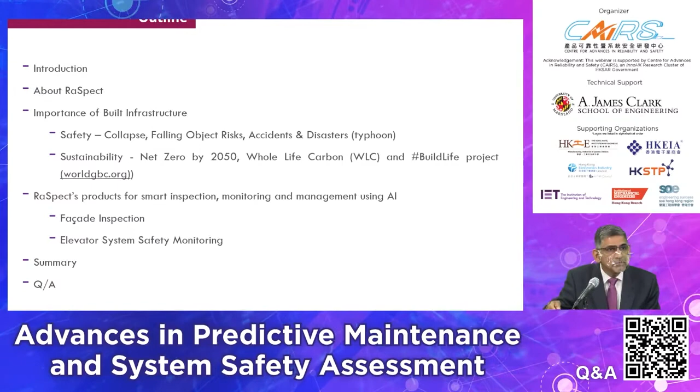Next slide, please. Raspect was founded in 2017 by young computer science graduate Harris Sun. He was at that time part of the Cathay Pacific Innovation Group, where he was bringing in some very novel ideas for inspection of aircraft fuselage.

As a civil engineer, I found when I got introduced to Raspect this story very exciting and inspiring, because very often we tend to ignore our built infrastructure, particularly when it comes to concrete, which is my background, reinforced concrete structures and so on. We don't put much value like we do, let's say, in the case of aircraft fuselage. So when someone is trying to apply the same sort of approach and technology to inspection, defect detection, and safety monitoring of our built infrastructure, which are quite important in terms of their value to society, I, as a civil engineer, definitely get very excited.

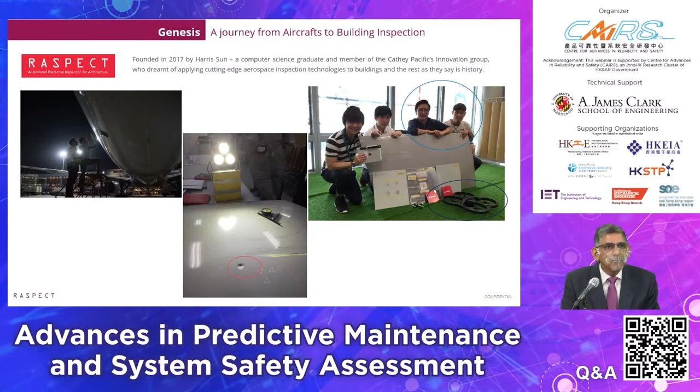Next slide, please. Raspect has had a very successful four-year journey. Next slide, please. In this time, it has been supported by a number of very well-known investors, and it's been incubated by the Hong Kong Science and Technology Park, where we are sitting today for this webinar, and a number of other programs run by the Hong Kong government to support startups.

It started with the Alibaba Entrepreneurs Fund, Particle X, Mindworks, and Abacus. The basic mission of the company is to raise the safety level, the sustainability, and the cost effectiveness of operating our built infrastructure systems by utilizing AI and robotics technology. So we add value by bringing in predictive technology to manage well-being at a lower cost and higher efficiency.

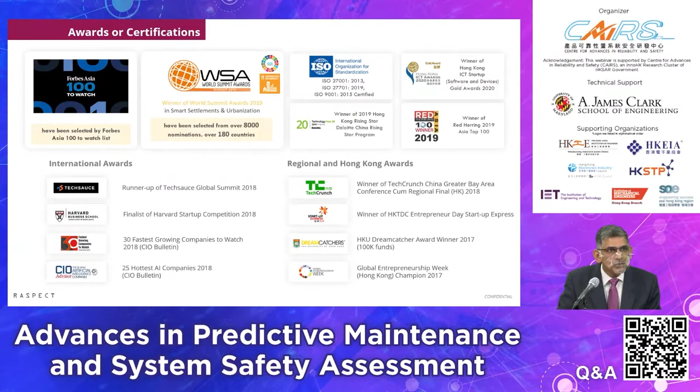And we have had the good fortune to serve very well-known customers in and around Hong Kong, including HKSTP, Polytech University, MTR, Arup, all of the very famous names in Hong Kong, whose properties and assets we've had the chance to inspect.

So coming back to building system safety, basically in Hong Kong we have more than 21,000 buildings which are over 30 years old, and this number is going to keep increasing. Every year, almost 800 new buildings get added to that figure. The number of buildings older than 50 years is around 8,000.

It will be greater than 8,000 by 2030. And interestingly, by 2040, one third of the people of Hong Kong, that's like 2.5 million people, and one third of buildings in Hong Kong, which will be around 20,000 buildings, would be more than 65 years old. So it's an aging society having to deal with aging infrastructure.

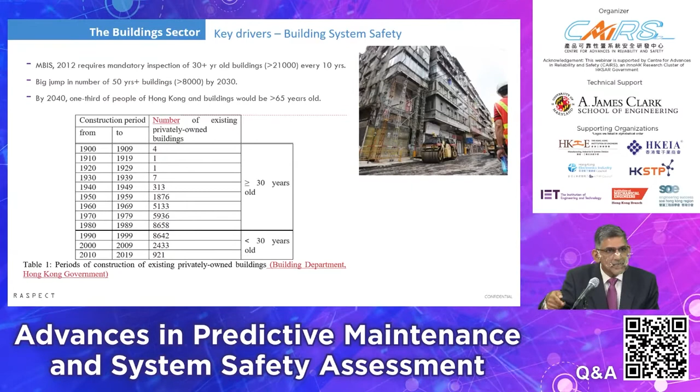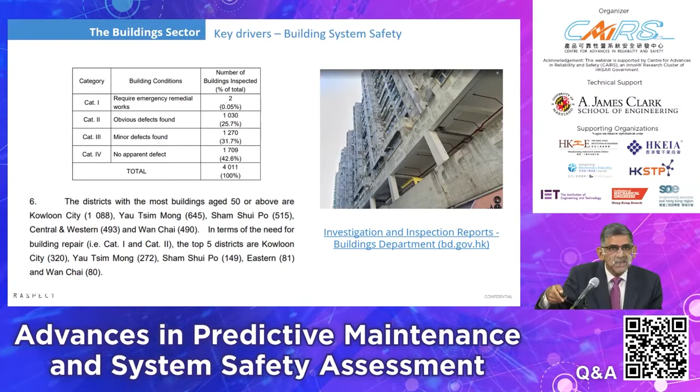And this was the condition at that time. The number of buildings in critical, emergency repair needs was 2. Then there were 1,000 buildings which had very obvious defects that also needed attention. So it's a fairly critical issue.

We at Raspect have developed a large database of the building stock in Hong Kong, showing the distribution of buildings with all their metadata, such as year of construction, type of construction, current occupation usage, construction technology used, and so on. So we can map out the current situation with respect to particularly tall buildings in Hong Kong.

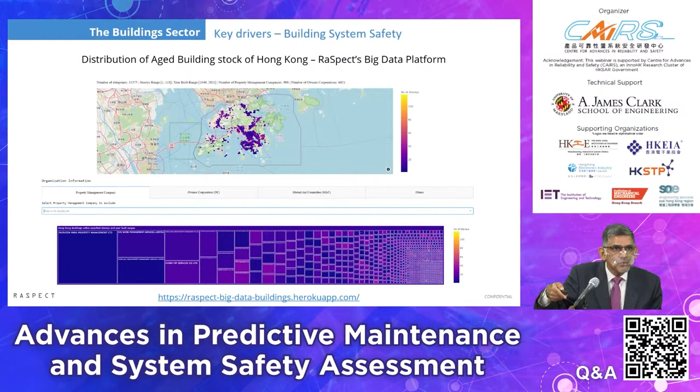So that's with regard to building safety issues, which motivate some of our work. The other key driver for Raspect's work is sustainability. And all of us know that the most recent IPCC report was termed 'Code Red for Humanity' by the Secretary General of the United Nations, because buildings are responsible for 40% of carbon emissions, primarily because of the energy they consume to run the buildings.

Buildings also use 50% of extracted materials. By 2060, the world's building stock is predicted to double. This is a big challenge, but it also presents a big opportunity, estimated at almost $24 trillion by 2030, to create energy efficient buildings.

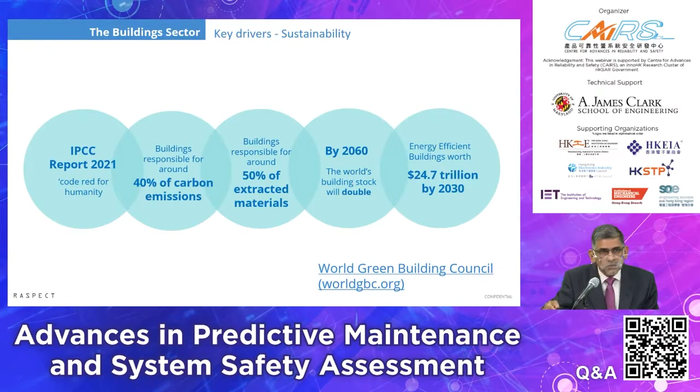So obviously this becomes a big opportunity for companies like us. Hong Kong's roadmap to net zero by 2050 is the target set by the Hong Kong government, and the national government's target is 2060, to reduce carbon emissions to net zero.

So doing this for Hong Kong will primarily mean addressing where 66% of emissions come from electricity generation, 18% from transport, and the rest from waste and other sources. 90% of the electricity generated goes into building operations, which accounts for almost 65% of the emissions.

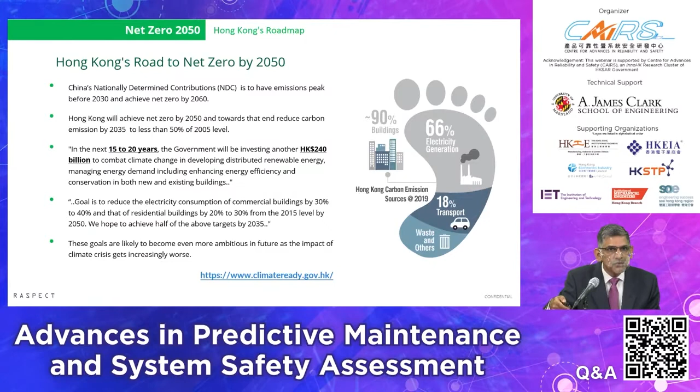So therefore we have to have better monitoring of building operations in order to find ways to minimize energy consumption and carbon emissions from our buildings. Building carbon emissions are composed of embodied carbon, which goes into construction materials, and operational carbon, the main source, from energy consumption.

The typical building design life is 50 years, but through our inspection and safety monitoring work at RaSpect, we can increase this service life and reduce the need for new buildings at frequent intervals. This brings down the whole life carbon footprint of the existing building stock and helps us achieve the net zero target.

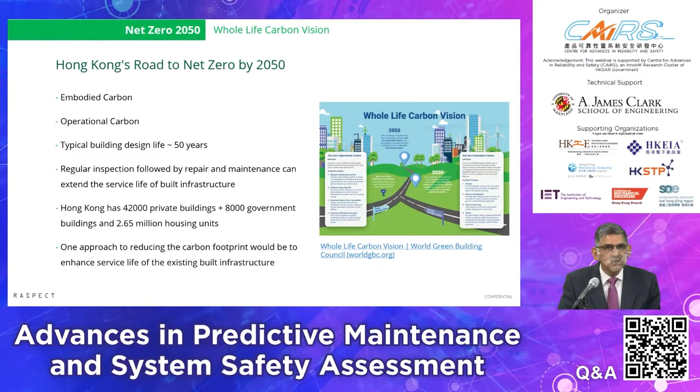So that's one aspect of the inspection. The other aspect is obviously reducing energy consumption in building operations. Now I'll move on to the actual products that RaSpect has developed and offers in this domain. Basically, we have started with buildings.

So this is a picture of our product roadmap, from AI-driven building facade inspection, which covers reinforced concrete and curtain wall buildings, to piping inspection. Most recently, we have come up with a product which focuses specifically on drainage piping systems.

We are then moving on to the interior of the building, where the electrical and mechanical system inspection is the project we are doing with CAiRS, which involves elevator monitoring, the elevator system functioning, chiller monitoring, which is a big part of the HVAC system and controls the energy consumption, escalator monitoring, and so on.

Then we are moving into the broader infrastructure segment, where we are already doing POCs of road inspection and tunnel inspection, bridges and power lines, and so on.

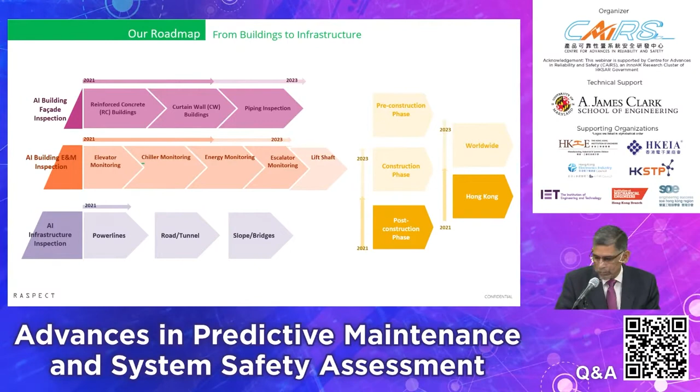On the other hand, our roadmap also covers the pre-construction phase of the building construction sector. It covers the construction phase as well as the post-construction phase. And Hong Kong is a great place to prove some of the utility of our products before we go global with many of these services and products.

This product portfolio can also be looked at as building management suite of products, construction management suite of products, and infrastructure management suite of products.

We developed this with the vision that smart city management, especially urban infrastructure management, where the whole world is becoming increasingly urban, these are the products that we are going to need for more efficient, cost-effective, and safe management of our infrastructure.

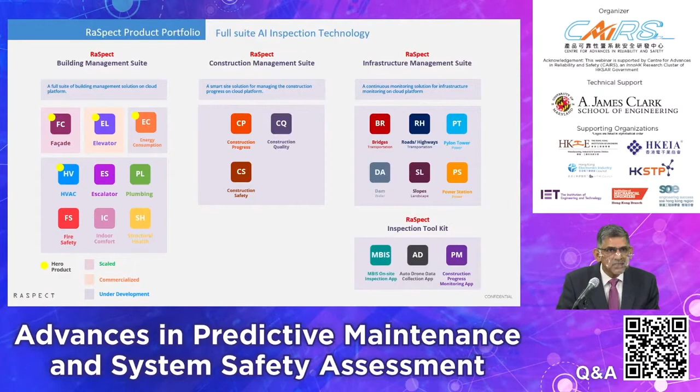Basically, if we can divide our current major products into the ACE facade inspection, the ACE elevator monitoring. ACE stands basically for AI Cloud Engine, which is our cloud platform where we offer our products and handle all the big data for processing.

So we use ACE for our facade product, for the elevator product, the chiller product, and eventually we are also developing the fire safety and indoor environmental monitoring products.

These products have integrations with building management systems, with IoT sensors, with digital twin and building information modelling or BIM systems. The core technologies that underlie these products are the visual analysis, the AI infrared analysis, the AI vibration monitoring, and the AI magnetic monitoring.

These are the 4 technologies that basically we use in building these products, and I'll try to quickly go through some of them. Next slide, please.

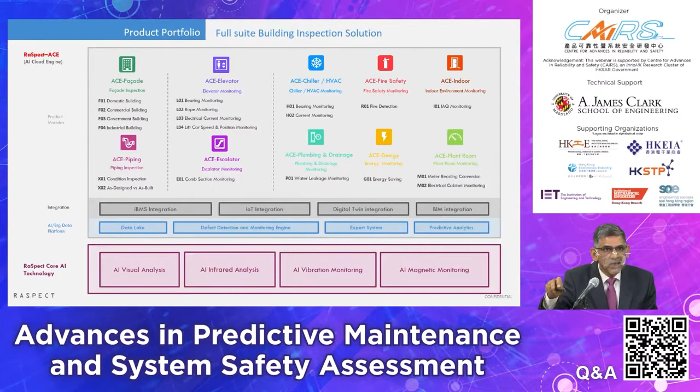The visual analytics or visual analysis is basically based on the visual data that we collect of building facades, and this is typically done through use of unmanned aerial systems or drones. This is part of the code of practice for mandatory building inspection promulgated by the Hong Kong government in 2012, where every building which is more than 30 years old must be inspected once every 10 years at least.

And the tall buildings of Hong Kong traditionally have been inspected through riding gondolas or using scaffolding, which is always unsafe, takes a lot of time, and can be very, very costly.

With our technology, use of drones and collection of the visual images, we are able to cover the entire facade or entire building envelope and then automatically analyze the data on our cloud platform using AI models to identify the most frequent and the most dangerous defects that you find on building envelopes.

At the same time, we are able to collect infrared images of the envelope and detect other types of hidden defects that cannot be captured through visual images. These defects can be water leakage, moisture problems, delaminations, debonding in concrete buildings, and so on.

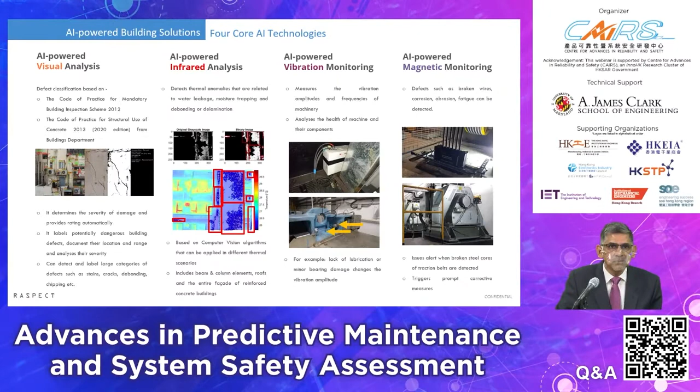One of our major projects has been with one of the landmark buildings of Hong Kong, the ICC building, and here we have used most of our technologies and proven the concepts, starting with the curtain wall inspection and the thermal profile of the building using IR technique, and the elevator bearing monitoring using the vibration monitoring technique, the water pump bearing monitoring, and all of this.

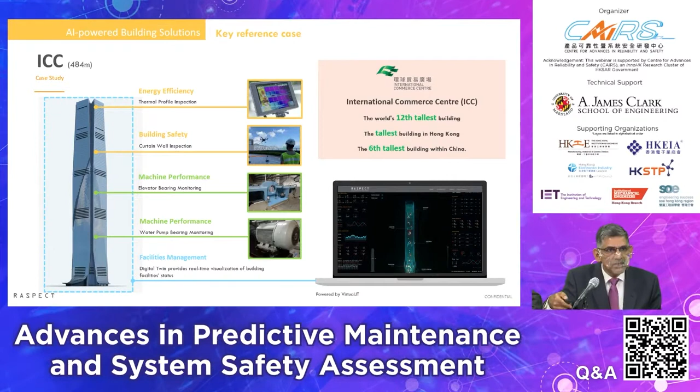We have also developed a digital twin which helps to visualize the results and in real time allows the facility managers to monitor the performance of the systems and the building.

We have a digital twin illustration here. I hope we can play the video.

So we have partners who help us in using our data to develop various visualization products, including digital twin and integration with BIM and so on and so forth.

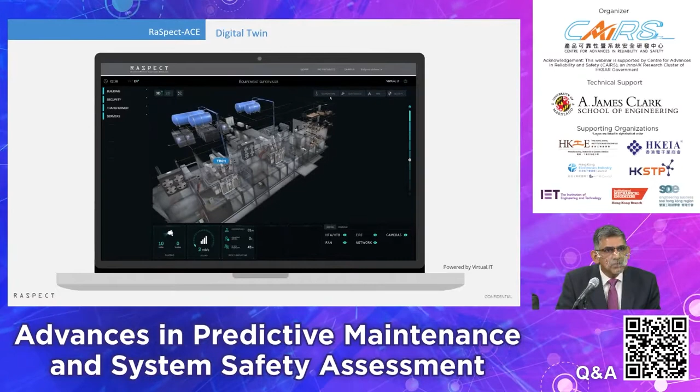exceed their set limits and so on. So this becomes a very useful tool for facility managers to operate the building systems.

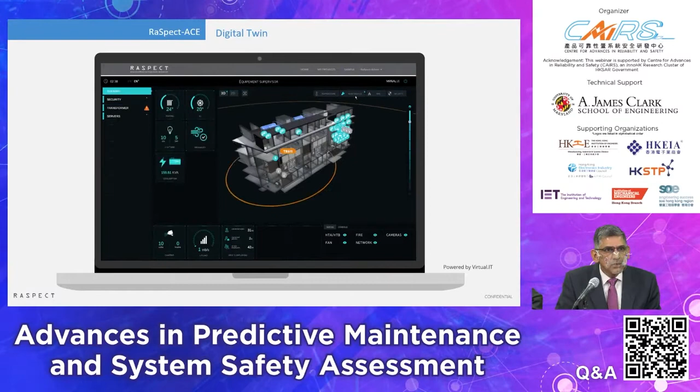So traditionally, digital twins have been used more for electrical and mechanical systems operation. But what we are doing as a company is to try to integrate the building envelope condition through routine inspection and the management of the building's physical and structural defects through structural health monitoring, and this is also being integrated into the digital twin of the system.

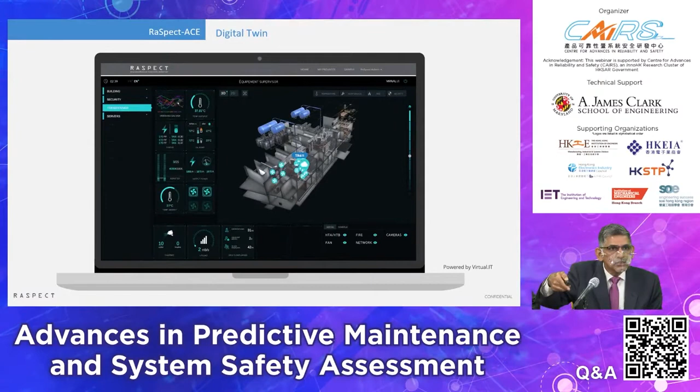So let me see if I can go to the next slide.

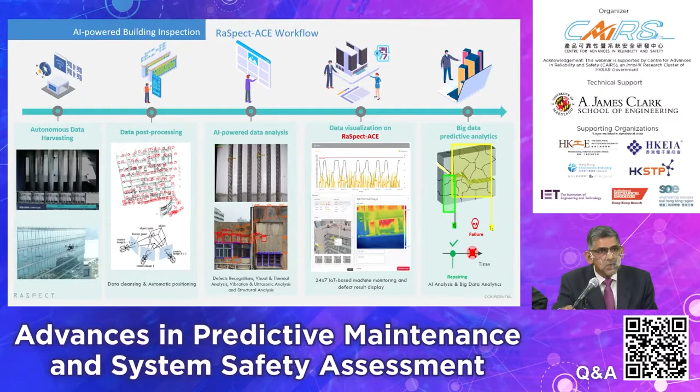As explained earlier, it uses both visual analysis and thermal analysis as the two main tools, with the visual camera and thermal camera carried by the drone. Next slide, please, to collect the data.

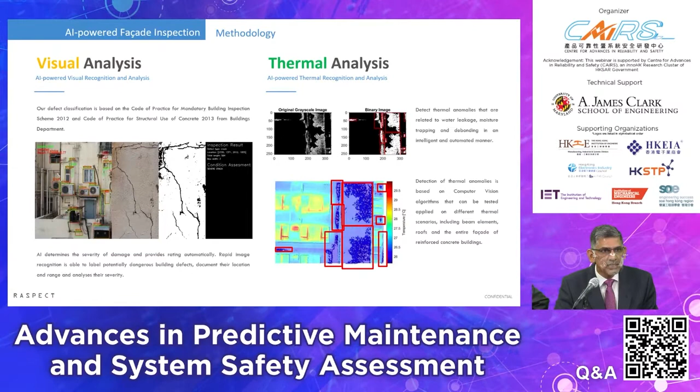One of the big differences between our approach and the conventional approach is that we cover the entire envelope of the building, whereas traditionally surveyors tend to cover only some important parts and therefore leave out much of the building envelope.

These are some of the deliverables from the inspection after the data has been processed. We can identify defects, whether it's a crack, a spalling, or a stain. We have a database of almost 60 different types of defects, depending on whether it's a curtain wall building, a reinforced concrete building, or a tiled facade.

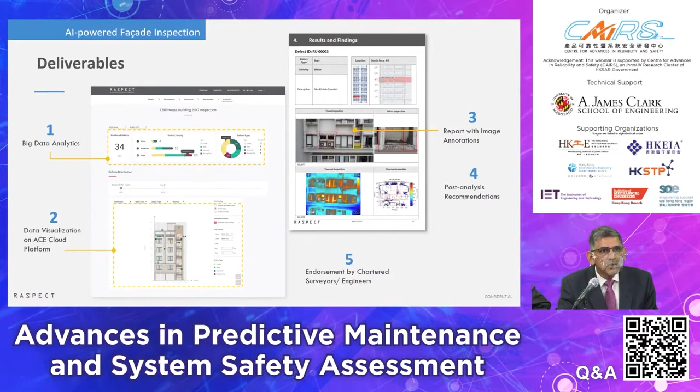Once all the visual data and thermal data has been analyzed, our cloud platform can represent them in different forms so managers can plan the different actions. They are also categorized in terms of severity, whether major, moderate, or minor defects, so repair and maintenance can be scheduled accordingly.

This is a screenshot of our cloud platform. Next slide, please.

All of our products have privacy protection, filtering out any privacy-related information in the images, and we comply with the relevant ISO standards. Next, please.

I think we'll play this video to give you a small demo of how this facade inspection product works.

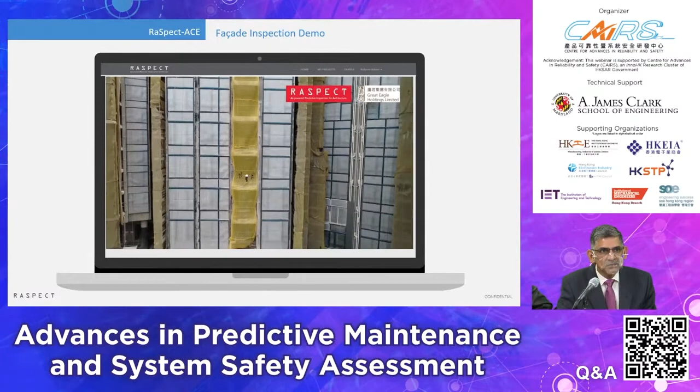This is from a project very close by, from this location in the Science Park, a very well-known project. I think the video has stopped.

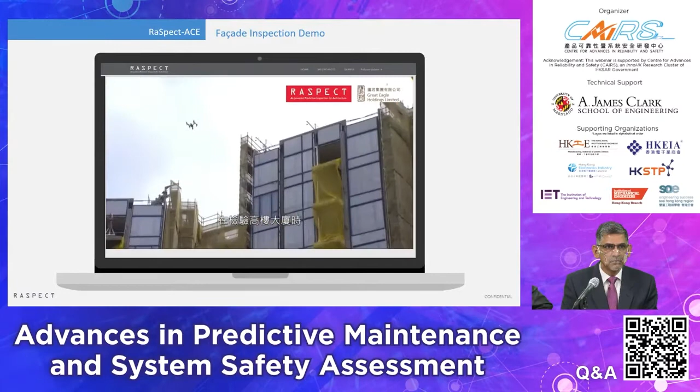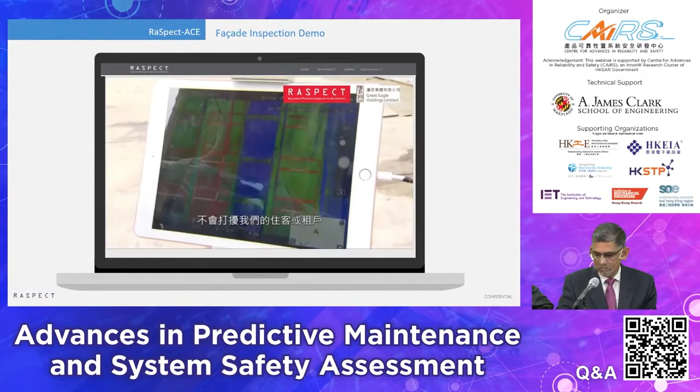Drone filming helps us to inspect high-rise buildings without the use of manpower and scaffolding, keeping our people on the ground rather than up in the air, which is a big save on safety. Secondly, it helps us speed up inspection in the construction process, which is a great help to not interrupt our residents and tenants in our buildings, so we can use drone technology to inspect the integrity of our buildings.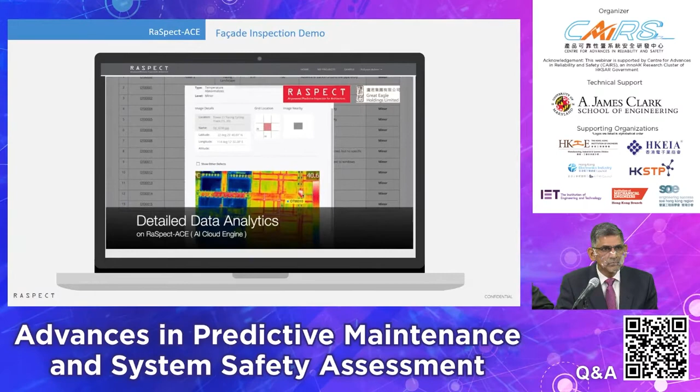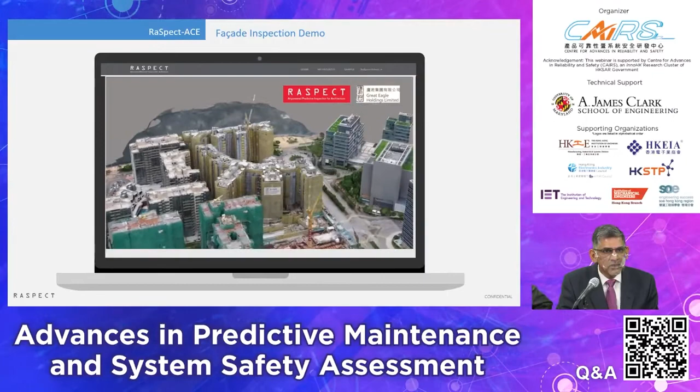Our system also produces an automated report of the inspection. All the information about the defects, the likely origin, the cause, the consequence, and the suggested remedy is already included in the report.

I think I'll go to the end of the talk now, and we can take up questions during discussion, and I can come back to some of the other products that I had planned to present.

One of them was the specific inspection requirement of drainage pipes during these COVID times, for safety and sanitation aspects of buildings. There was a requirement to have a specific tool and technique to inspect piping systems, which are often sites of leakage and spread of infection.

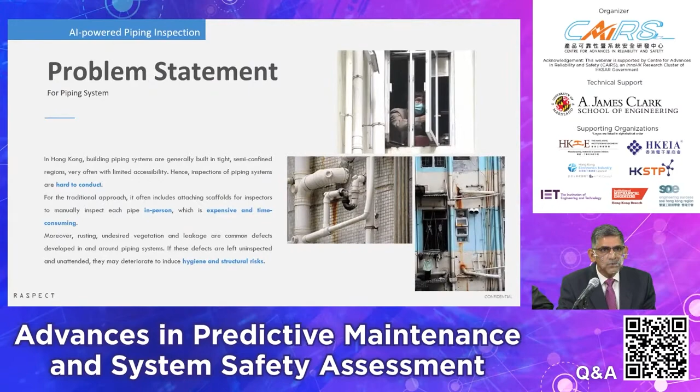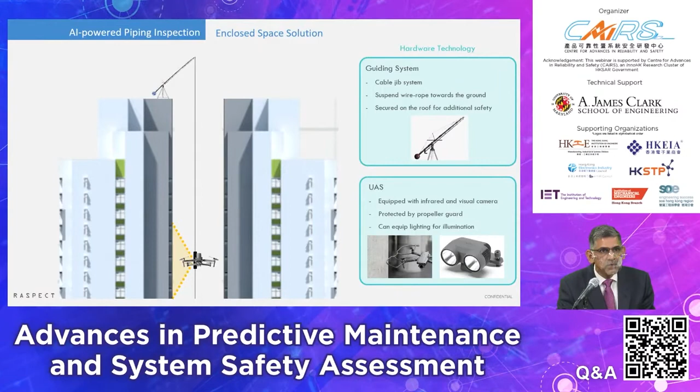Can we go to the next slides, please? We have successfully trialed this product recently, and it has been very effective in detecting automatically and very quickly all the defects in piping systems.

This is a quick one-minute video showing how this is done. We fly the drone using a cable jib supported from the roof of the building, and we capture the video. Our AI model is able to catch all the defects in the piping system without anybody having to climb the building or take any risk. This is our latest innovation.

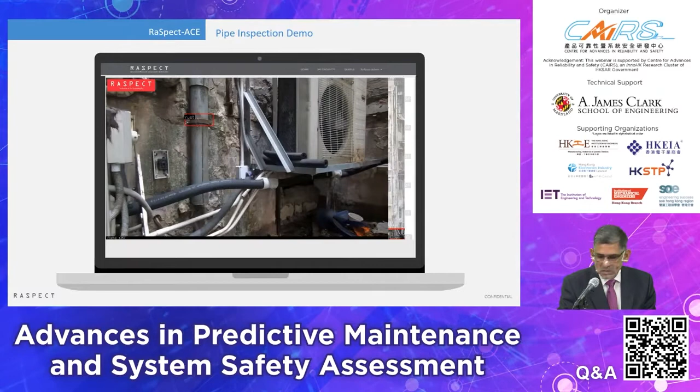The last portion of the talk was about elevator inspection, and I will skip it for now since time is almost up — we'll come back to it if it comes up during the question and answer session. Let me just go to the last slide if possible.

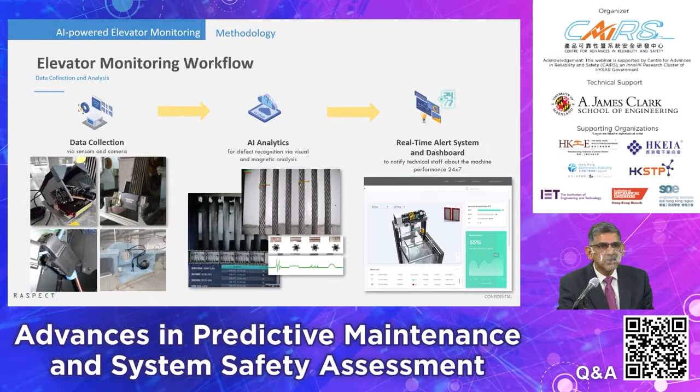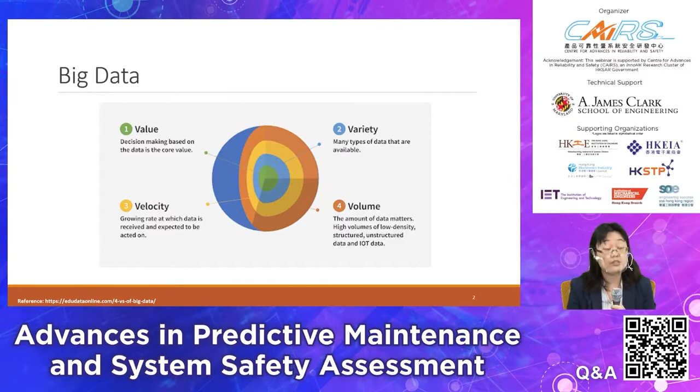The data can be, as Dhanada showed, images, not necessarily just text data. There may be different types of social media, and we may have videos or sound data. So the question is how to extract that data so that we can make use of it to help us do some predictive maintenance.

On the other hand, right now we are more concerned about data-driven models. For data-driven models, we consider data mining techniques such as classification, clustering, association, and regression. These are the typical approaches used in data mining.

Apart from all this data, we cannot ignore experience. Sometimes technical staff may give hints about how to make use of the data. When we have this information, we can conduct predictive maintenance.

Through modeling, we can determine the remaining useful life, and also conduct analysis about degradation. For example, through the use of IoT and sensor devices, we can understand the condition of the components.

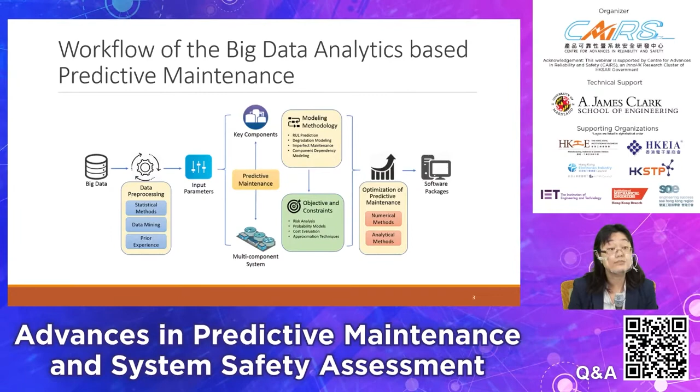What are the three maintenance strategies commonly used to manage assets, and how do they differ? The first is referred to as reactive or corrective maintenance. The second is known as preventive maintenance. The third is predictive maintenance. Let's take a look at how they differ.

With reactive maintenance, an organization may not be able to achieve the full service life of the asset. When asset failure occurs early, some of the potential life of the asset is lost. With preventive and predictive maintenance, the organization is able to potentially achieve the full service life using proactive planning methods, which vary in their mitigation effects.

An organization will apply one of the three maintenance strategies depending on its future orientation and attitude to managing failures. With reactive maintenance, there is no attempt to gain insight into the future. Issues are managed in the here and now.

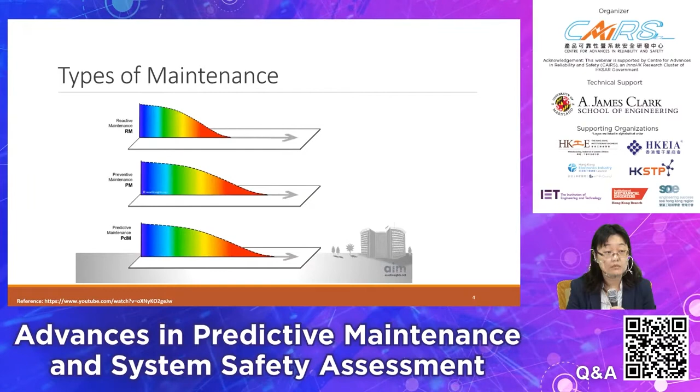Finally, maintenance activities can also be plotted onto a deterioration curve. The graded color scheme reveals the changing risk profile of the asset being maintained. With reactive maintenance, no action is taken before asset failure, and the organization can be caught off guard.

Preventive maintenance follows a fixed interval approach until the asset fails. Predictive maintenance, on the other hand, applies variable intervals of maintenance as the asset condition changes.

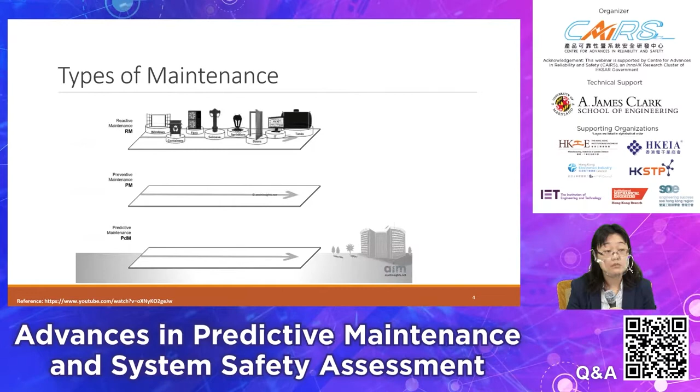At the end of the day, each asset needs to be aligned to an appropriate maintenance strategy. These decisions are based on many factors, including the criticality of the assets, regulatory requirements, and the availability of diagnostic technologies to reveal concealed condition.

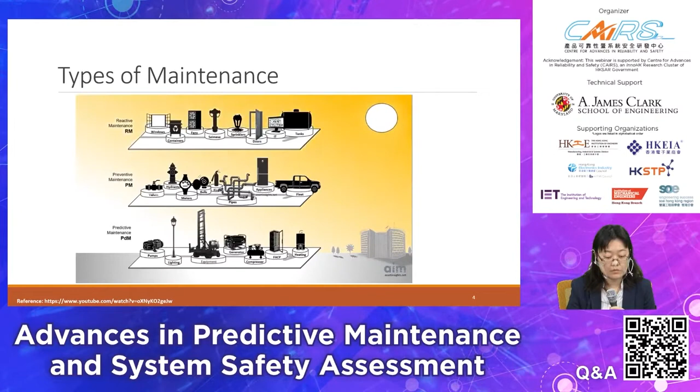Okay, so when we go through the videos, I think you can roughly realize the importance of predictive maintenance. And also when we do predictive maintenance in our maintenance policies, first of all, maybe we consider the criticality of the failures.

So in some critical assets, they may have a high rank in priority formulate. And also in our strategies, we try to think about what is the next machine breakdown and what are the random errors.

And indeed, for the sensory data, it can give us monitoring of the conditions of those devices. And for the current operation status, for example, if in some cases they find abnormal performance, then we can ask the technician staff to help identify what is the failure situation.

And what are the failure modes of the machines. And with the reliabilities, the system must provide correct measures. And for us, we can see the performance in the predictions in those areas for the feasible and also foreseeable machine failures, and also somehow we think about condition-based monitoring.

So another major thing we consider for the time series is what times we can carry out the maintenance and repair operations. Surely the ideal case is that we want to have zero tolerance of equipment failures.

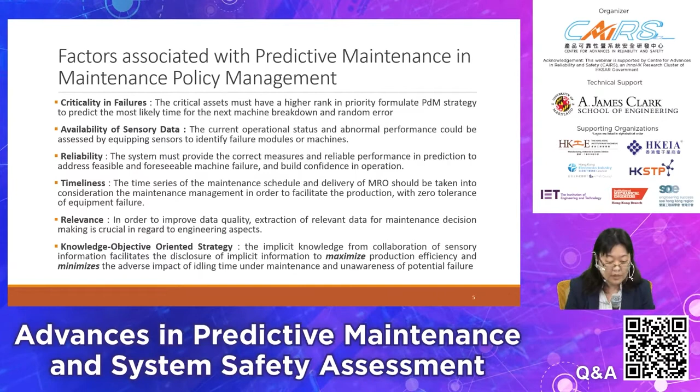So for the next slide, you can see here is about predictive maintenance models in big data platforms.

So the ideology of predictive maintenance is to create transparency of the machine's conditions, and also utilization of available information for the maintenance decisions.

For the case examples, later we will show here about the semiconductor situations. So in the big data platforms, we can try to think about the operations of the maintenance decision support systems. And also for the operating data, for example, we will have vibration data.

Sometimes we have heat sensor data or pressure sensor data. So for those sensor informations, then combined with the big database and making use of some big data techniques such as MapReduce techniques, we can help extract, transform, and load that data in a timely manner.

So based on some data algorithms, then we can realize how to carry out predictive maintenance.

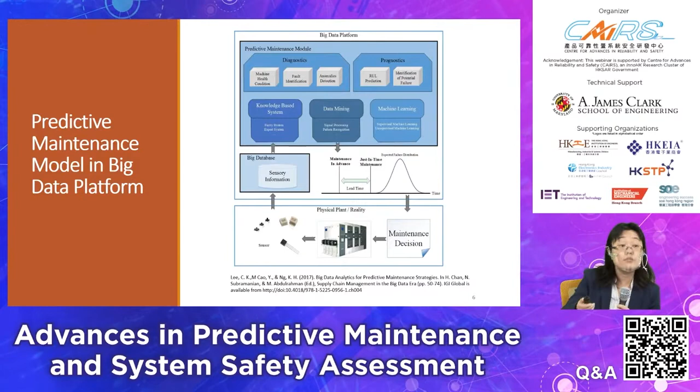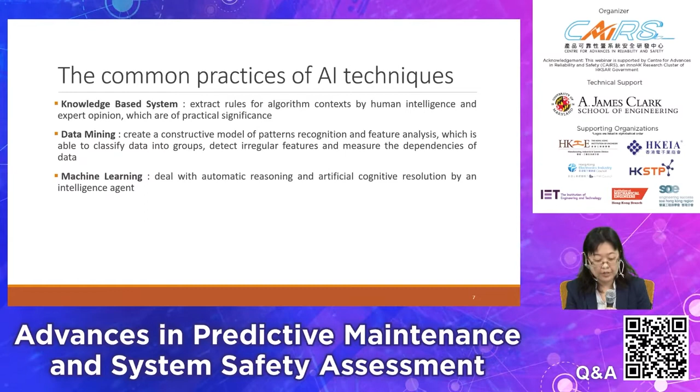So for the common practice for the AI techniques, most of us know that we would like to set up knowledge-based systems. We hope that through extraction of rules or algorithms, together with human intelligence, we can have some insights about the information. We can also have machine learning techniques and data mining techniques.

For this figure, I don't need to go through in detail because the first speaker already went in depth about the prognostic and diagnostic process. But just to give you a full picture, when we realize there's some fault, it's time for prognostic, and then we think about remaining useful life, and that is the diagnosis about what the failure time may be.

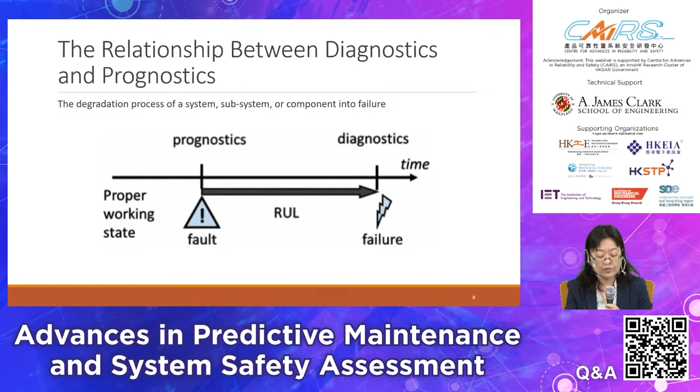At the system level, we think about how critical components may affect the whole system, since a system is made up of different components. When we predict the remaining useful life, we estimate the useful performance life cycle of the whole system, and come up with the output as our prognostic result, which can also update the prognostic history.

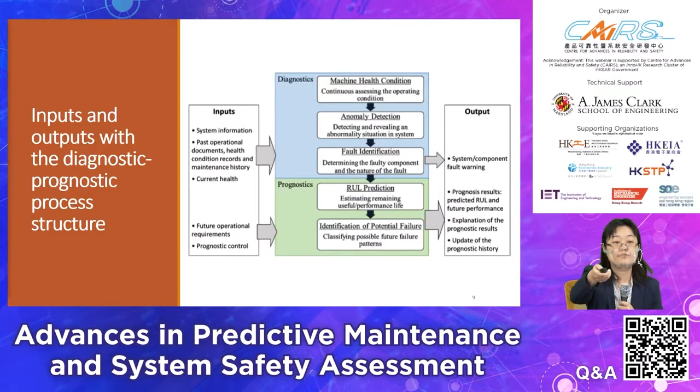Sorry, I need to go to the next slide. So for frequency and downtime, as I mentioned, these are the two dimensions.

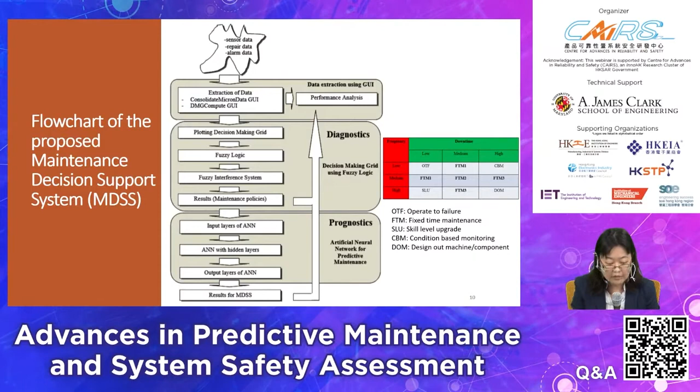When we look at those strategies, sometimes we may find that in certain cases we prefer to operate to failure, because of economic concerns, or the criticality of those components may not be a high priority. But at the same time, we may think about fixed time maintenance. For example, if the frequency is medium or downtime is medium, we also try to classify even the fixed time maintenance into different categories. And for frequency which is high, or when frequency is low, we would like to make use of condition-based monitoring. So here are the generals about the strategies we adopt based on these two dimensions.

When we look at these cases, you may say, okay, we already have the table, why bother making use of AI techniques? But on the other hand, we always have the fuzziness of high, low, or medium, because sometimes it's very difficult to set the boundary of that data.

So we try to make use of fuzzy logic for diagnosis of machine failures. We make use of fuzzy inference system editors, and then we come up with fuzzy rules such that it can be more systematic.

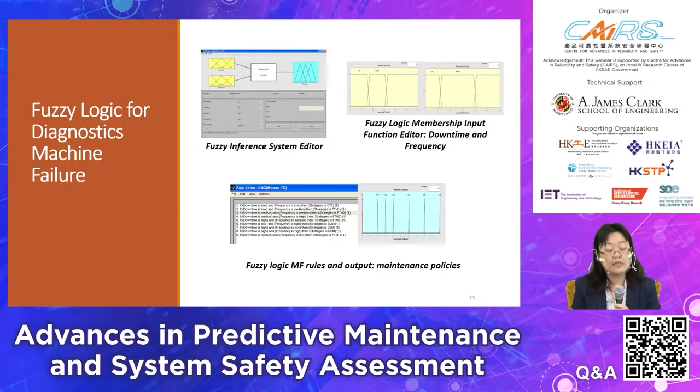On the other hand, for diagnosis, we may think about how to visualize, because in certain cases when we see the data, there's a lot of it. How do we visualize it and realize, okay, at this time, these values fall in the range where we should carry out certain types of maintenance? It gives us a better picture about the decisions we should make.

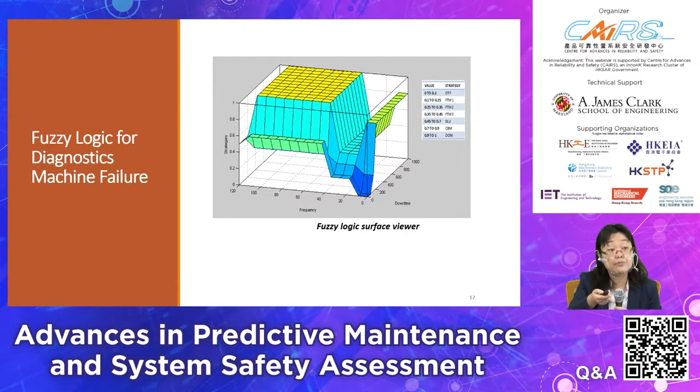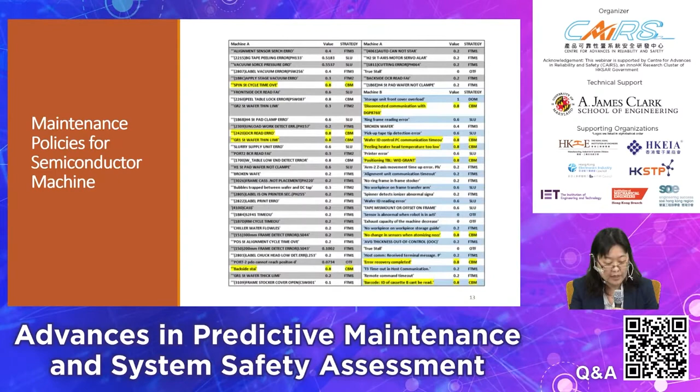Most likely when we collect the data, we have the vibration signals. We need to process those signals and then derive the degradation features. After that, with the multidimensional deep neural network, we have the concatenations, and then we can come up with the regression layer, so we can predict the remaining useful life.

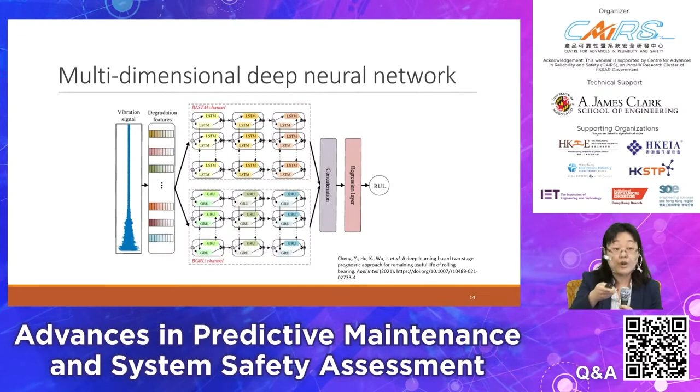For the details of the research, I won't go into detail since it can be found in the paper. I'll just use a few minutes to round up because of time issues. So for the predictive tasks in the multi-dimensional deep neural networks...

We can see the health condition assessments - to recap this morning's seminar, our main goal is surely to monitor the machine's performance and the machine's component degradation, and consider maintenance actions we try to carry out, figuring out what components can be replaced. Sometimes it's very difficult to repair, but maybe the easier way is replacement.

For anomaly detection through the systems, we can base it on past historical patterns and realize what is normal and abnormal. On the other hand, we think about making use of machine learning techniques to identify current and normal conditions for identifying abnormalities.

Regarding remaining useful life assessments, we also think about estimations and monitoring of useful life through sensory information. I think many companies have a lot of sensors and devices to identify useful life, and the main issue is that we have to do forecasting and projection.